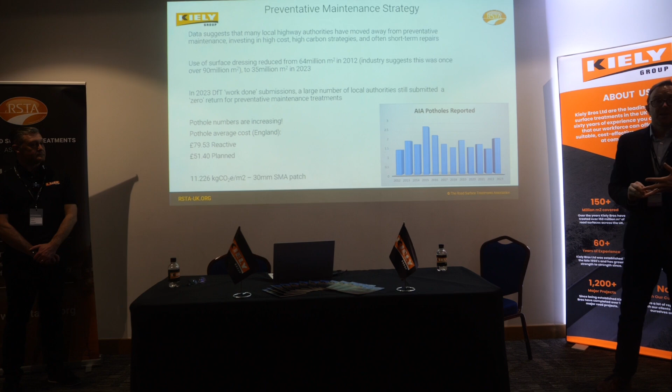If you look at the DfT returns, work done, the number of authorities still recording no preventative maintenance, whether that's surface dressing, preservation, or microsurfacing. So it all points to the fact that pothole numbers are increasing. That's a chart taken from the Asphalt Industry Alliance, their ALARM survey. And you can see there was a spike in 2023 in the number of potholes.

And the same reports, and this all comes from data from local authorities, every pothole repair, if it's planned, it's probably about £51. Does that take into account overheads and traffic management? Probably not. Up to reactive, which is about £80. In London, it's about 120, I think it is in London. So these are huge costs.

So for very small cost, we recommend that you apply these sort of treatments that are going to stop all these potholes forming. And we talk a lot about cost, but one of the things we can also compare is their carbon as well, because these surface treatments are significantly lower carbon. And many authorities have declared climate emergencies. You have your associated carbon saving targets, and these treatments will actually support those strategies as well.

So having done this, as Neil said, I've had 29 years in local authority maintenance. And this was a report I did in 2023 for our local councillors. So they wanted to understand what were we doing already that makes a difference. So initially we said about costs. So all of the treatments that we were doing, and that was surface dressing, preservation, retexturing, microsurfacing, and in situ recycling, which you'll hear about in a moment. The cost of that programme of work was £5.1 million.

Had we treated that same area of network using conventional asphalt inlay, it would have cost us 17.8 million. So you can see that by using these treatments, that money's going a lot further. You're treating more of your network. If you're only laying asphalt, you're only treating such a small proportion of your network. That's why everything else around it is continuing to deteriorate. You're missing that window of opportunity to treat it, and that's when potholes start to develop and you've lost it and you're into resurfacing. So that was the financial side of it.

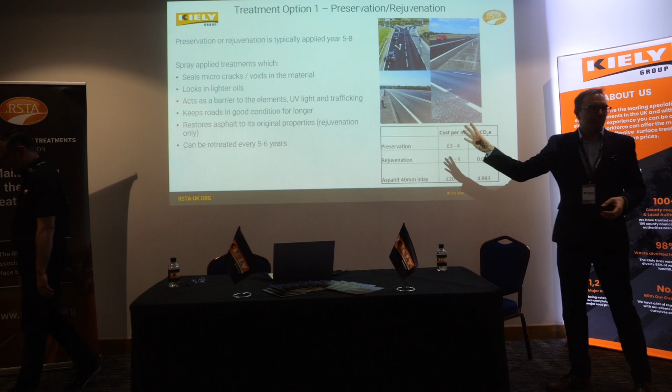So if you go to the next slide, we're talking about preservation and rejuvenation. These are two very similar treatments. These are spray-applied treatments. So preservation, there's penetrative and non-penetrative. The penetrative one goes into the surface, it seals all the micro cracks, it provides a barrier on the top of the surface. Some talk about it like a sun cream almost.

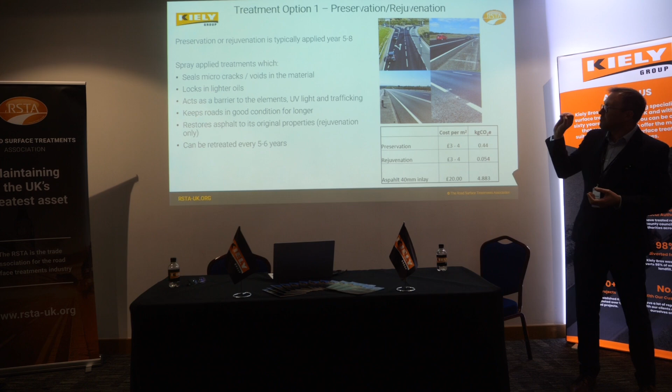It's like a barrier to the UV light, exposure to the elements and trafficking. The rejuvenation is slightly different. It chemically modifies the binder to put it back to its original properties, so it sticks it back together. That again seals the surface, stops the water getting in, but what it does, it keeps that road in good condition for longer.

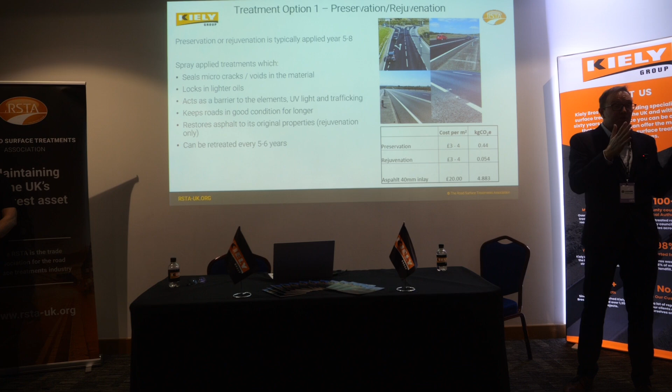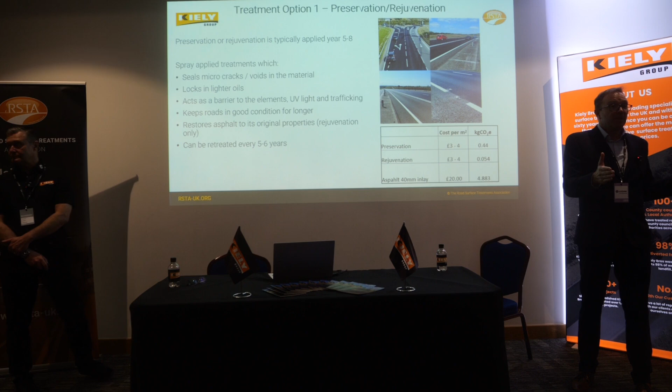So I had a formal complaint, a guy, we were treating his road, and he said there's worse roads, and I said, well, we've got two choices. It's in good condition now. If we do nothing, that road's going to start to crack, you'll start to see that open up, there's going to be potholes, it's going to fail.

For very low cost, we can keep your road like it is now, and it will stay like that for 5-6 years, and then we retreat it again, and we keep maintaining that road for low cost in good condition. He retracted his complaint and wrote in to commend us on our approach to this, so that was a huge shift. The young lady has another question.

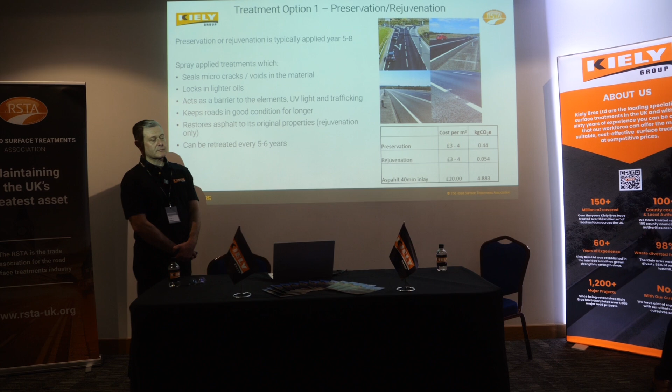Oh, sorry. I'm a councillor with loads of problems about potholes, that's why I've got another question. Is there a particular type of machine that does this preservation? So yeah, the benefits of some of these treatments is they're very quick, so they don't cause the disruption that you get when you've got resurfacing, because you could have everything from your planer, your sweeper, your lorries with all your material. Equally, lorries taking material away, so there's lots of materials.

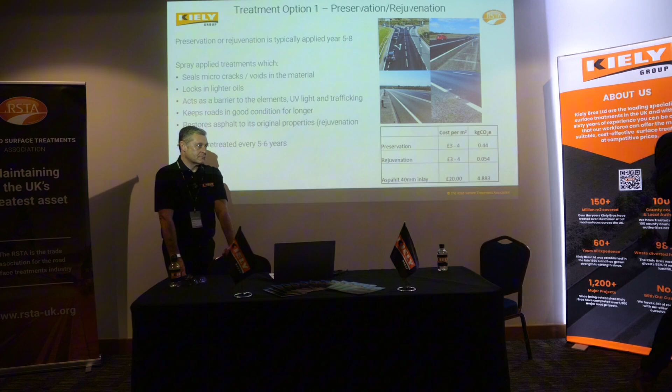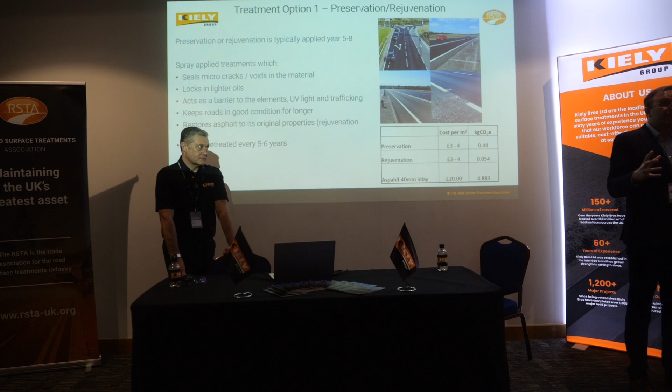Preservation is just a sweeper and a spray tanker, effectively. And some of these can be done at night, so they're very low impact on the network. They don't cause the same level of disruption. So these are treatments that keep that road in as new condition, pretty much. So it won't come as a surprise to you that Lauren's got one. So if we go on to the next slide, please, Neil.

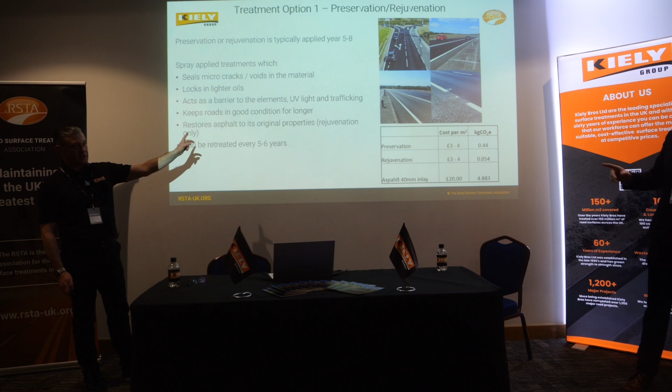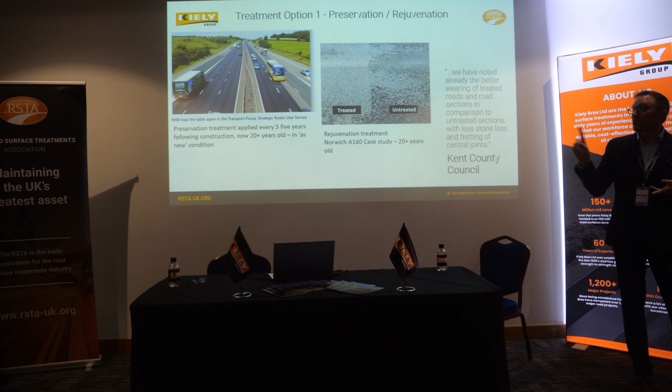And did you mention how long that road's been going for, the M40? M40 is on the next one. There she is. So the M40, this is a section of road that was constructed in 2002, and ever since it was constructed, it's been treated with preservation treatment every 5 years. So that's now over 20 years old, still in as new condition. It's won 2 awards that are voted for by motorists for being one of the best roads in the UK. So if you can continue to maintain and treat that road in that condition, that's the optimum for me.

The question, I mean, it's a long road. Is it specific areas or is it long stretches of the M40? So what we typically do, what we did in Dorset, we actually mapped out, so as we laid a new surface, we would pencil in that first treatment, so we didn't miss it. So typically about year 5, we would start looking at it year 4-5. If you wait until condition data tells you there's cracks in it, you've missed almost that first window for treatment, because a lot of the cracks that form are often in the material, they're micro cracks in the material.

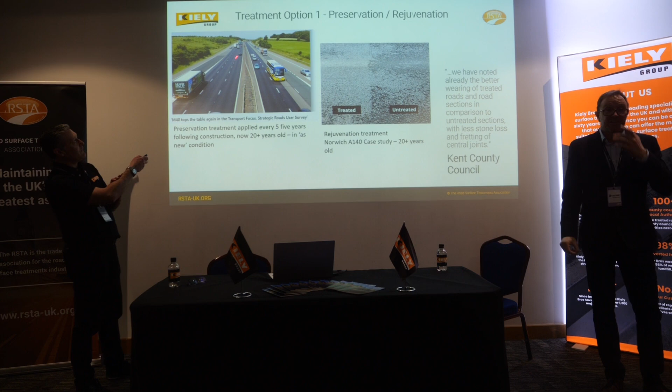Did you mean the M40 being the long road? Yeah, what part of the M40 is that part that's been treated? Oh, I haven't got that. But you can see here, on the case studies around it, what they do is they deliberately leave an area. So they'll treat an area. You mentioned you had an area in Dorset that you treated all the way through, and then you left an area? We just left a test section to compare and contrast. Oh, okay.

Yeah. So that's where the research comes. So you'll do a long run, and then you leave an area so that you can see the performance of how the rejuvenation has worked compared to how you've left it. And the area that you've left in Dorset is now starting to fail, isn't it? Yeah.

Same young lady. Come and take a seat. What I've noticed is, we've got sort of narrowish roads, but in the middle, that's where we get the potholes, where it kind of comes together. In the middle? Yeah, so we had that conversation.

So what happens in the middle, you've got your road surfacing, so the machine that lays the material is only sort of like the width of a lane, not the width of a carriageway. So what happens, you get the joint between the two sections of material that they've laid, and that will be the first point of failure.

So this is what we were doing in Dorset, is we would identify that site for treatment. We would seal the joint, so we'd do like a joint seal all the way through. If there were any localised areas that needed either patching or crack sealing, we would do that, and then we would apply the treatment over the top. And it would stay 5-6 years, and then we'd be looking to retreat it.

I just want to check she's not here. There was a lady just earlier on who thought the white line that we put down was actually munching the asphalt, that it was what caused the problem. It wasn't. It was because it's where the roads actually join. The machine is only lane width apart, so you end up with seams along them. It's like laying pieces of carpet, and then it's the join that's failing.

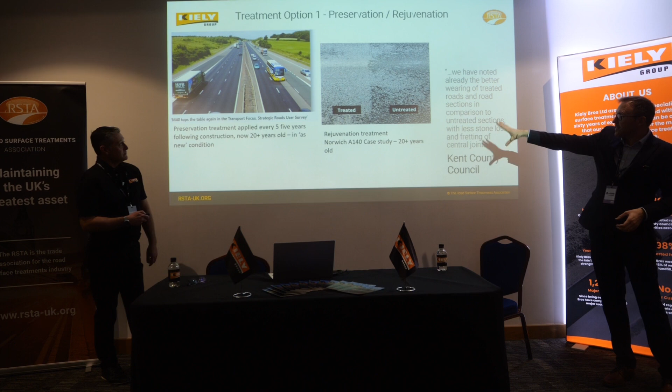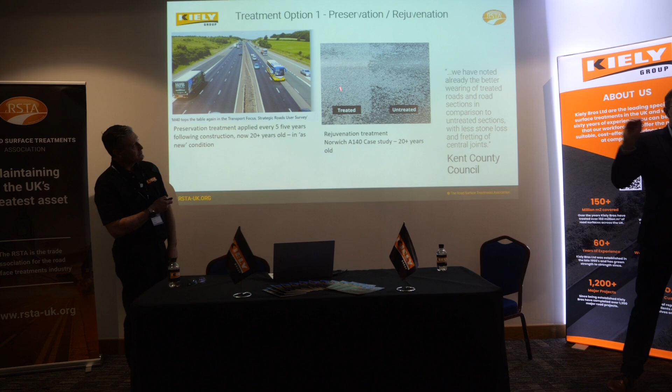So we're increasingly starting to see, I mean, that A140, that's another one. So that's a rejuvenation. So that's a very similar product, but that's over 20 years old now. The section that hasn't been treated has now been resurfaced by here. The section that had been treated is still in as new condition. So it just keeps it in good condition.

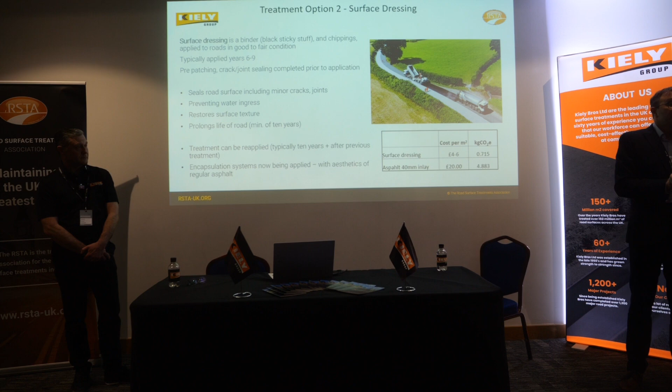So if you've got to a point where your preservation, you've looked at it and it's gone a bit beyond that, you've got a little bit more cracking in the surface, structurally the road is still sound, but you're looking at what else can we do on it. So this is where we move into surface dressing. So surface dressing is the black sticky stuff that you spray on the road, and then you apply the chippings on top of it. And typically you leave it a little bit of time to get the embedment from the traffic travelling over it.

And everybody talks about, okay, this is part of rural treatment, we don't like the loose chippings. So there's been huge developments in these materials now. You know, the binders are a lot more able to hold onto the aggregate. But the biggest development is these encapsulation systems that we now spray over the top. And now, not only does it lock the chips down so you don't have the loose chippings, but it looks like a conventional asphalt.

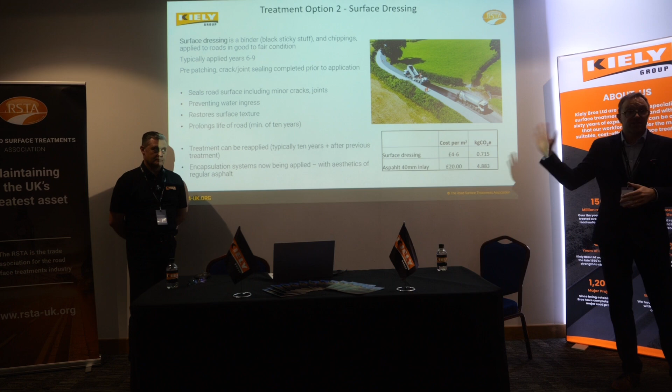You know, we've had, in the past, lots of complaints about surface dressing. Last year, we encapsulated every single site in Dorset. I didn't get one single complaint about surface dressing. And some of my colleagues in other authorities, one's a very urban authority, and he was taking that back into his own authority and said, we're going to start doing this around this city. And he was really pushing the boundaries. This is actually a great solution, isn't it, for public perception as well.

So the public will want a brand new road. They want you to come in, take out what's there, put a new road down. That's not physically possible, financially viable, and structurally not required, because the structural integrity of the road is 9 times out of 10 still there. So all we're doing is, if you think of a Christmas cake, this is effectively putting a new layer of marzipan over the Christmas cake.

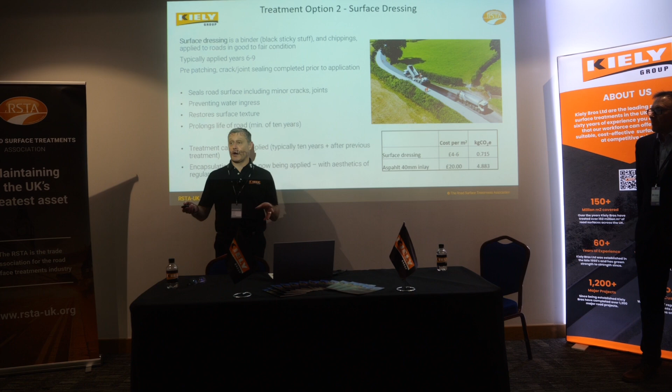And so from a public perception, they've got a new road. It looks brand new, got new lines on it. What we've actually done is we've sealed the road that's underneath it, we've protected it, but also made it look like a brand new road at the same time. And so the people that live in your area, they think they've got a brand new road, you've given them the perception that they wanted, but from a structural perspective as well, you've protected your asset, you've maintained your asset at the same time. Dual benefit on there, yes.

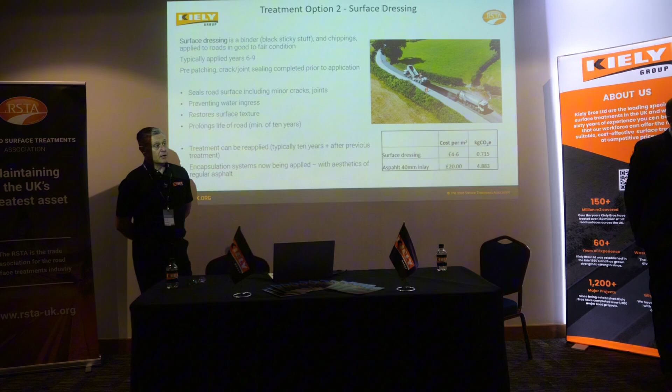So I'm a county councillor. I live in a rural area, but I'm a town councillor as well. But one thing from the surface dressing on rural roads is the water tends to get in under it. Is that resolvable? Because we've had roads surface dressed by us, and what would you say, the last 10 years before they start breaking up?

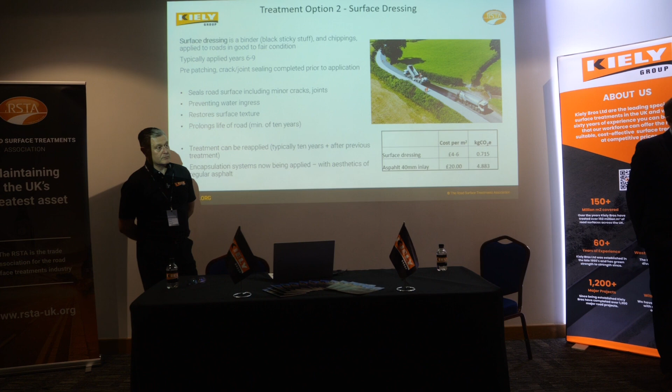Yeah, so drainage, water is the enemy of your road. So you need to maintain your drainage. That's one of the key things that I learned 30 years ago when I came into highways. You need to keep the water off the road. You need to drain your roads well. So keep your drains, your gullies, ditches, grips. You need to keep them clear and running to get the water off. And you need to seal your roads early. However you do it, seal your roads and stop the water getting in.

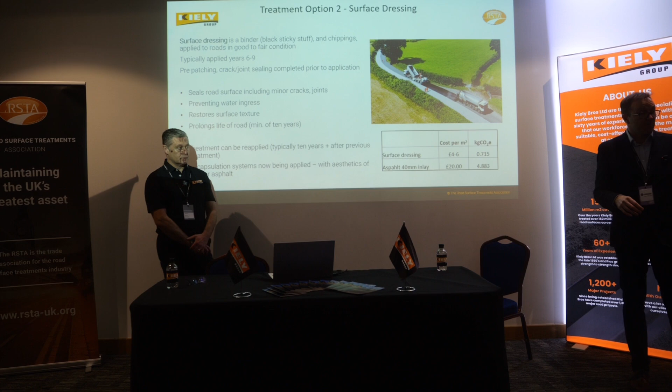So if you've got any capital programme, because a lot of revenue's tight, so you use revenue money to empty your gullies, dig your ditches and grips. But what we were doing is when we were doing these programmes of work, capital funded, we would do the drainage when we were there. So typically we would do full drainage surveys right to the nearest outfall. We would dig ditches, dig the grips, because it's essential you get the water off. So you've got that opportunity to capitalise that work while you're doing these schemes.

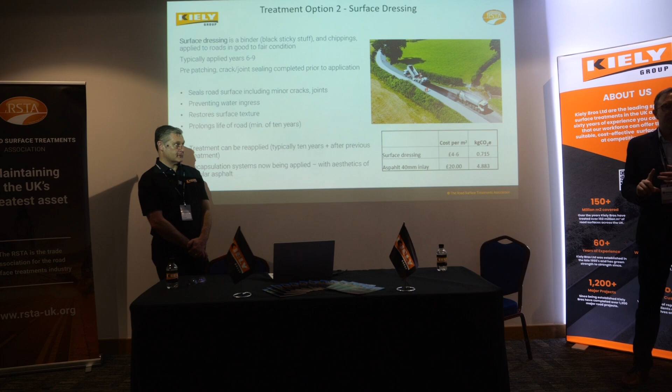But if I could just draw your attention to the cost here. So surface dressing typically is about £4 to £6. It's going to depend on a lot of factors, the size of the programme, etc. But typically about £4 to £6 a square metre. Inlaying that 40 mil of asphalt, just that surface course, is about £20 a square metre. Now the life you'll get out of those two materials is exactly the same. It's 10 to 15 years typically, depending on how much traffic you have on it. Okay, so why would you pay £20 when you can pay a fraction of that for surface dressing?

And the other thing as well is, we'll come to you, sir, if you do surface dress a road, it isn't a one-off treatment. You can then over surface dress your surface dressing, and you can keep building layers up. Probably about 3 times, then you take it all off. But then you're 15, 20 years down the line, and you've had some fantastic value.

Yes, sir. Would you agree that the sort of surface dressing where they put a little bit of binder and then a load of chippings and they go all over the place, that's a bad way of doing it? I think it's awful. And that's where we offer CPD training for both operatives and for officers, so they can calculate the optimum levels of binder and chippings. But typically they're over chipped. But they are swept afterwards to make sure anything that hasn't embedded and is loose is removed.

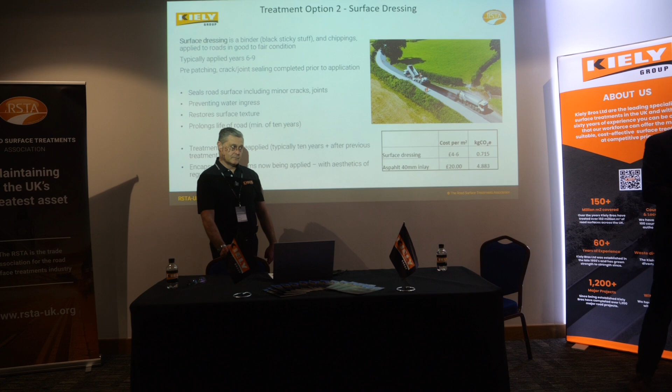In Coventry on the road near me, it was left for over 12 months and the stuff was just going everywhere. 12 months? Yeah. Good practice would be to sweep very soon after. Within a few days? Yeah. I've heard up to like 2 days. If you do the encapsulation, you normally do like 2 sweeps, a couple of days, and then you apply the encapsulation. So that really deals with the issue of these loose stones.

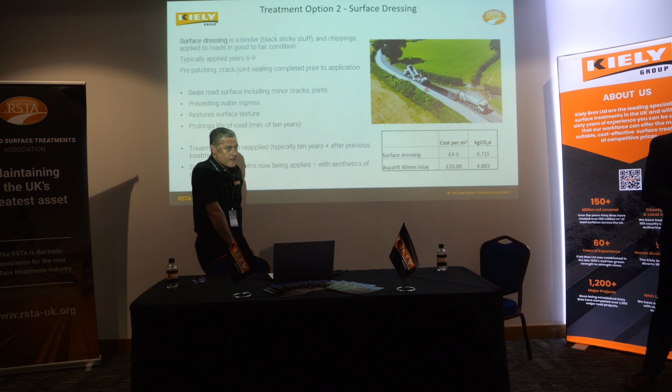Just one other question, you may be dealing with this later. What do you do with a road, say like an A road, where in a car you might hear a bit of noise, but it's fairly large pieces of chip that are protruding slightly all the way along, so that if you're on a bicycle it's a bit of a bone shaker and it just goes on for mile after mile? The chips are embedded in some sort of tarmac, but they're 3/8, half an inch in diameter, and they're sticking slightly above the surface, jutting out.

And to vehicles, certainly lorries, they just wouldn't know. And if you ride a bicycle, as I do, it's really quite torturous. There's the A41 north of Wolverhampton going into Staffordshire that's like that for mile after mile. Sometimes that's done for skid resistance.

So the way that skid resistance works is if you've got a jagged edge on the road, and then the rubber of the tyre brakes, it will catch on that and the friction will stop the vehicle. So it could be that that's what it's designed for. It's the side of the road that's worse. Yeah, and that's where the tyres haven't worn it down. But without seeing the site, it'd be hard to say. Right.

So we did some modelling over the longer term, like surface dressing as a preventative maintenance strategy versus an end-of-life strategy. And when we compared the two, the early life preventative strategy was a 66% saving on cost over that 60-year period. And over that same period, there was about 75% carbon saving as well. And that is only the capital cost. That doesn't factor in all the cost of fixing potholes.

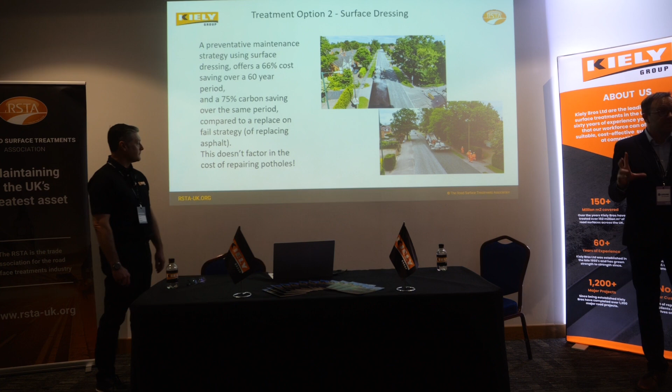So, you know, I think if there's an opportunity to apply some sort of surface treatment, surface dressing, do it and stop that getting to that point where you're into fixing potholes. So the third option is microsurfacing. So this is a cold applied, effectively a thin surface overlay.

And this typical example there where you've got a road, I mean this estate was built in the 60s, it's got a really solid base, very consolidated, structurally sound, but the thin veneer on the top has just scabbed off. So this was optimum time to get on it. Ideally we probably should have done it a couple of years earlier. But we got on it with a micro surface, and that will regulate all those minor surface defects. It will only do so much, so if you've got deep potholes, it's not going to fix those.

But this will regulate out all the minor defects, seal the surface, and you can use these treatments on urban areas, but equally you can use them on high-speed roads as well. There are particular products that you can use on high-speed roads. So when you're paying that sort of fee, £7 to £10 a square metre, why would you pay £20 a square metre when you'll get the same life out of these treatments? So it makes sense to treat your roads, and we had some great examples in Dorset.

So the road, you've missed all those opportunities to do all these treatments, and now your road's in really, really poor condition. And somebody said to me today, why do we see roads that are full of potholes and some have got circles round and some haven't? Well, some authorities, we know they're tight on revenue budgets, so they will fix the ones that are actionable, like more than 40 mil in depth, for example, and they won't treat the one next to it because they can't afford to.

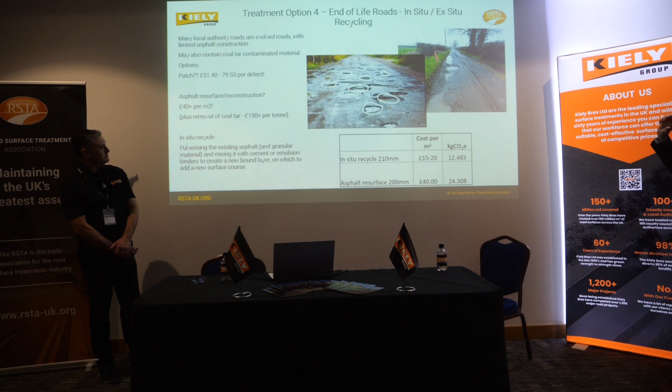So what we're trying to say is, rather than keep fixing those potholes, because that's not a permanent solution, you could resurface it, but again, it's going to cost you a lot of money to treat some of those roads. Those are some significant fails in that there's probably not enough construction in that material. So what we're looking at is methods of recycling.

So rather than resurfacing, think about in situ recycling as an example, where the machine pulverizes all the existing material. Then you add a binder to it, so that might be a bituminous material, it might be cement, and you then form that solid base that you put a new surface on. So you're not taking any waste away, you're repurposing all the existing material to form that base, and then you could put a double surface dressing over the top of that to seal it off.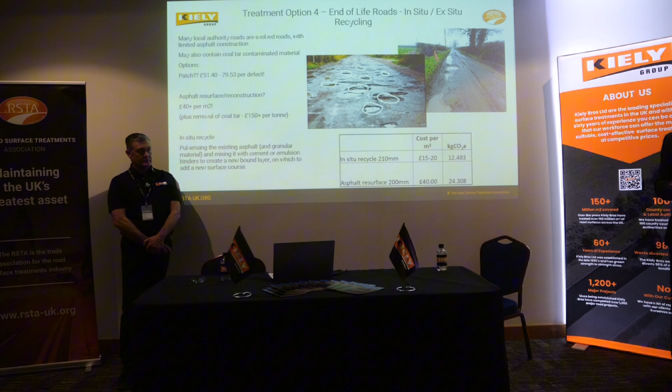And that again, really low cost compared to doing conventional reconstruction effectively. And again, half the carbon as well. So why not think about some of these recycling treatments? That can be good if you've got the water problem as well, can't it? Yeah, because typically they would factor that into how much cement they're going to put into it if you've got a really wet area, so that might just make it a little bit more robust.

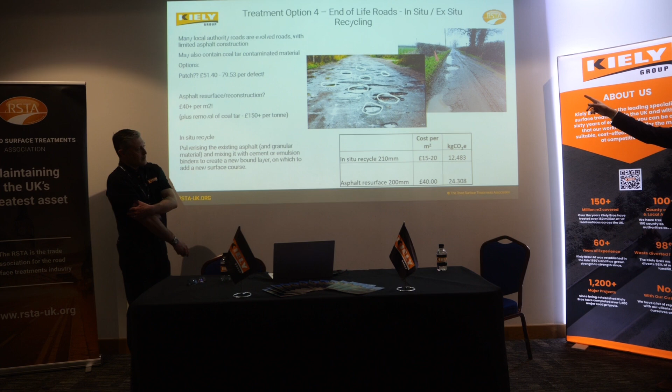So certainly that one is one in Dorset that we did, and we double dressed that, and these have all evolved from tracks effectively in Dorset. We've got lots of roads with no construction, lots of heavy agricultural vehicles on them, and by doing this, we're building that construction into it so we can take those heavy vehicles without deforming the material at all.

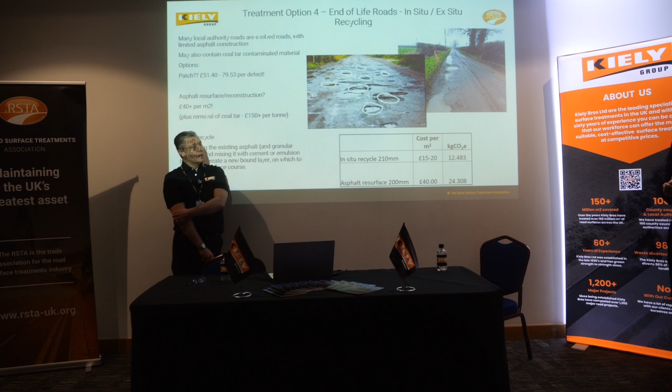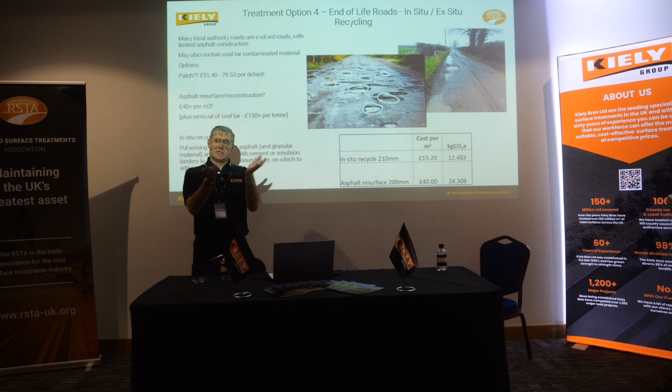So somebody asked me earlier on, they said that they keep getting a rut developing in the same place, they keep throwing more asphalt over it, but the road keeps sinking. Well, that's because the structural integrity of the road underneath has failed somewhere. It might have been washed away over a period of time with undersurface water. So then you have these types of structural geosynthetics and meshes, which actually give you some greater structural integrity to put back into the road surface as well.

That can prevent slips and falls and deformation as well in wet areas. So we see these sometimes built in as part of reconstruction jobs as well, so that we can maintain that structural integrity when we're then going to retreat the top of it, and that will stop potholes from forming as well when we're reconstructing the road.

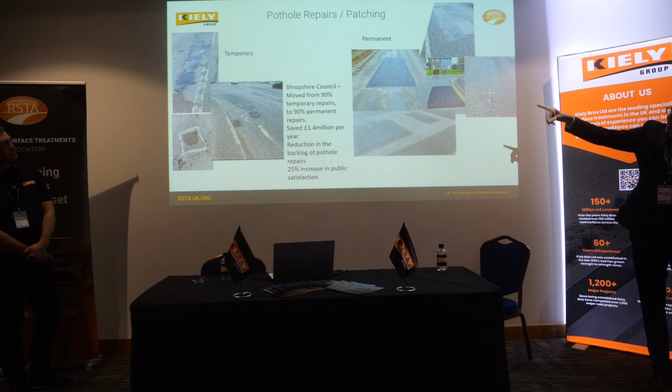So this is my pet hate. This is temporary repairs where you only do the temporary repair. And I know why authorities do it, because they have these 7 days they've got to fix the pothole, so they'll go in, a shovel full of asphalt, get that done within 7 days, don't follow it up. And then next month the inspector goes out and he finds the next one. And in that example over there, we've got sort of like 15 subsequent repairs. I think we've got potholes on potholes sort of thing.

And it's just a very temporary approach, but some authorities are doing this as an absolute minimum and not doing that permanent follow-up. So this was something that I had conversations in my own authority about, and we moved to this: do the initial fix, keep it safe by all means, but do the follow-up permanent repair. And if you're doing planned works, it's always a lot cheaper than doing reactive works, because it costs a lot more to send the guys out for 7 days to get the work done. Nowadays, with all the technology at your disposal, you can identify these defective areas, almost do some route optimization and send the guys out and do these types of permanent repairs.

And there's lots of different methods. It's not just conventional now, there's spray injection, you've got thermal patching, there's the thermoplastic material, there's all sorts of things that we're now doing as well. So lots of options, but get it done once and for all. But if you've got some fails like this, and that material is uniformly starting to go in the same direction, do your patching and then do one of your treatments and seal it off, and you're not going to then see those recurring areas of failure that you need to go back and patch.

We chatted earlier when you asked me about some of the patches that are failing after about 2 or 3 weeks, and that would have been these types of things. This is what we call splat and pat. We just splat it down, pat it down, and it's just making the road safe to drive over as a temporary fix. But then, as Mike says, that will then need cutting out and a proper patch putting in its place. That's what good looks like. If your roads have failed, then somebody needs to come back and put it together. That's just a temporary one, but sometimes the temporary ones are just being left as semi-permanent, and that's why they keep refailing.

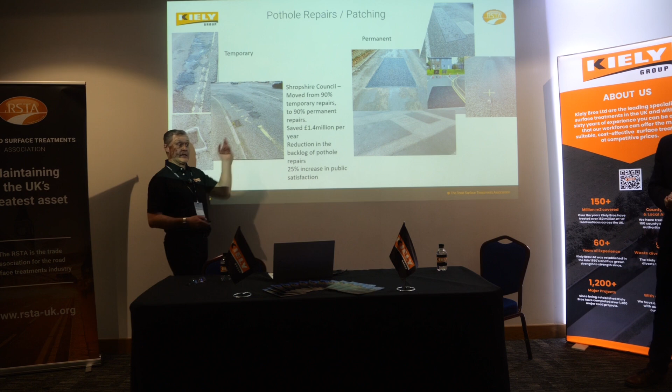I live in Shropshire, and they've gone back to the temporary method, or at least it feels like they have. But they do these permanent repairs, and they don't last either. They look permanent, solid and square. Yeah. So if the permanent repairs are not lasting, then you've got to look at workmanship or what materials they're using, have they used the right materials? If you've got a very wet area, for example, like we said earlier on, deal with the cause of it to start with.

If you've got very poorly maintained drainage, deal with that, stop the water from forming on the road, because that is going to attack, whether it's a patch or existing asphalt, and accelerate the rate of deterioration. If they're not cleaning their gullies, like the drains, how many times do you go across the road and look down at the drain and it's got weeds growing out of it, you can't even see down into the drain. Well, that means all of the surface water is running down the road, not going into the drain. And to the lady at the front's point, that then sinks into the road, everything cracks again.

And we talked about the contract that your authority might have with its maintenance contractor. The gentleman at the front was talking about a particular problem he's got in his area with his contractor, and there's some real issues there as well. So it may not be the process, it may not even be the workmanship, it could be secondary issues. And this is part of the problem with so many local authorities maintaining so many roads, that the standards, the contracts, the materials, the topography are all different.